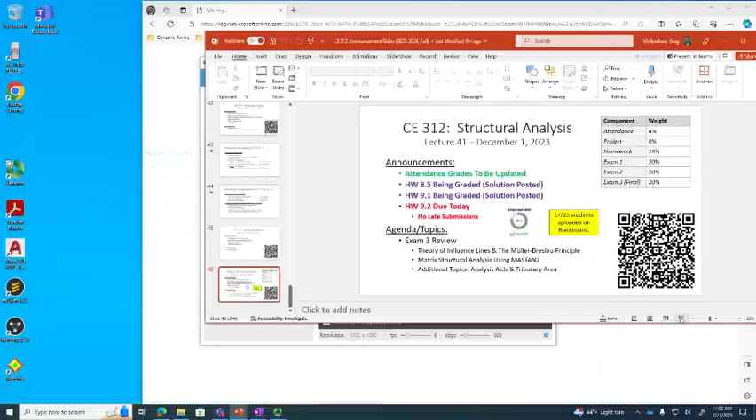Okay, so let's talk about the final. In terms of logistics, the first point I would make is that the final is no longer than any of the other exams. I don't create my final exam to be 2 hours long because I have a 2-hour long time slot. It's an exam like any others, okay? The only class where I probably have ever violated that rule is statics because the final's comprehensive. But in here, it's just another exam, okay?

It's closed book, closed notes. You can have a calculator and a formula sheet. Also, I think a straight edge will help with things like influence lines. So make sure to bring a straight edge. I do design the exam with my rule of 3. So if I can do it in 20 minutes, you can do it in 60 minutes. And I've given a final like this before, and the vast majority of students are walking out well before the time has expired. So I'll be here obviously the whole 2 hours, but it's not intended to be a time crunch.

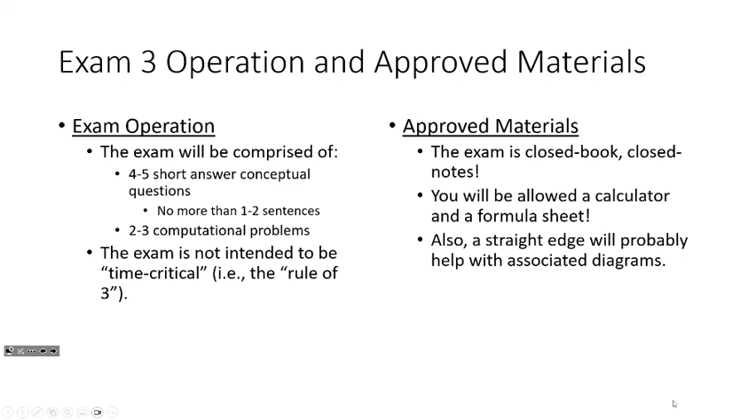As for the formula sheet, you can do whatever you want on the formula sheet, except I don't really want to see fully worked out problems. And again, that's more for your benefit than it is for mine. But I do want you to make it yourself. No just fully screenshotting the slides. I say that I'll collect them after the exam, but probably I'll just look at them because I know some students like to keep their formula sheets for reference for future classes. I keep the finals, but you can have the formula sheets when it's all said and done.

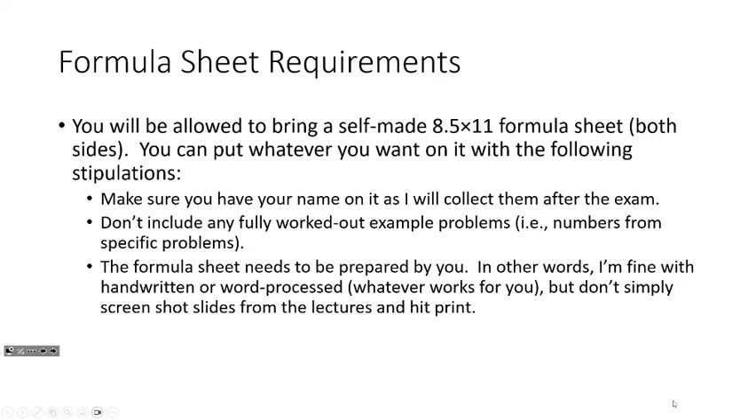Let's talk about the topics on the exam. So the 3 main topics on the exam are influence lines, MASTAN, and the stuff that we've done this week. For influence lines, make sure that you can construct an influence line for a response: vertical reactions, shears and moments at a given point, fixed support reactions, all that. Make sure that you can use an influence line to ascertain response due to either concentrated loads or distributed loads, and either loads that move or loads that don't. And then make sure that you can use those influence lines to develop maximum response. That's pretty much everything that we did with influence lines.

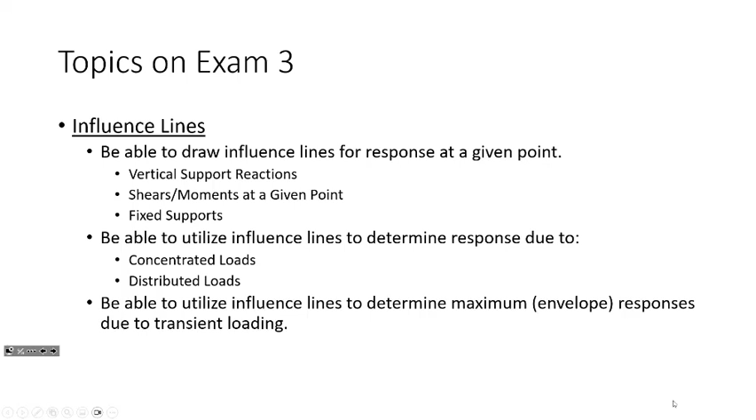For MASTAN, or the computer analysis of structures, I'm not going to make you break out the software. I want to make sure that you understand the software. So I want you to just generally understand what's going on with matrix analysis, but make sure that you understand the operation of how MASTAN works. So how to create the geometry, how to assign properties, how to define conditions, how to actually run the analysis and post-process the results. So that's really what I'm after, the conceptual side of things.

For the additional stuff, make sure that you can utilize and/or derive analysis aids for performing basic structural analysis, and then make sure you have an understanding of tributary area. That right there is the exam.

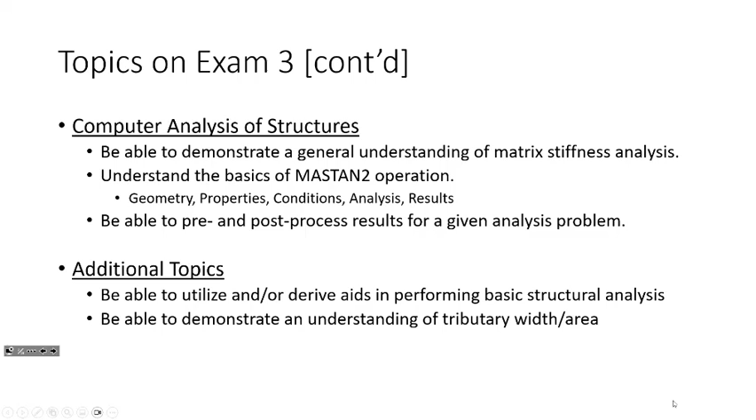What I have left in the slides are the greatest hits from the past few lectures. So things like, here are the rules for drawing influence line reactions. So for example, whenever you're drawing the influence lines for all the reactions, that's what I want to say. I have a beam here with 3 reactions. Here's all 3 influence lines.

You know that the influence lines equal 1 at the reaction of interest, and they equal 0 at all other reactions. They are always straight lines. The hinges serve to change the direction of the line. And whenever you sum up the quantities along a vertical column, they all sum up to equal 1 if you're looking at all the reaction influence lines.

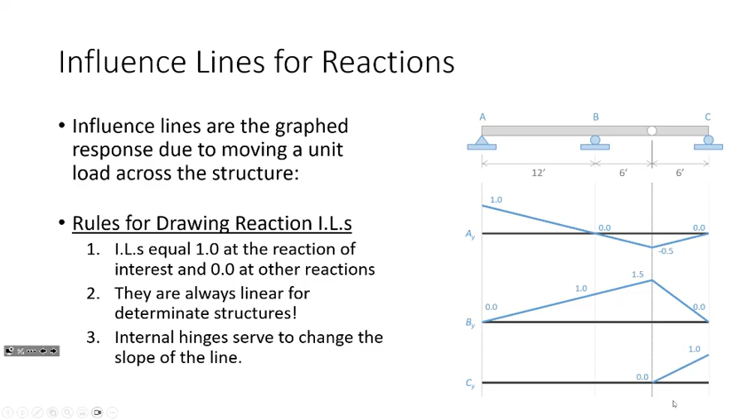For shears and moments, that's a different story. But if you have just all your reaction influence lines, that plus that equals 1 at every point along the influence line. For shears and moments, I've included the rule for determining the heights right here. Whenever you're drawing shear and moment influence lines, again, they're always linear. Again, the hinges serve to change the direction.

But the big thing for influence lines for shears and moments is that they always equal 0 at the supports. Okay? If you put a load at the support, the beam experiences no load. So at the support, the influence line for internal shears and moments is 0. Okay?

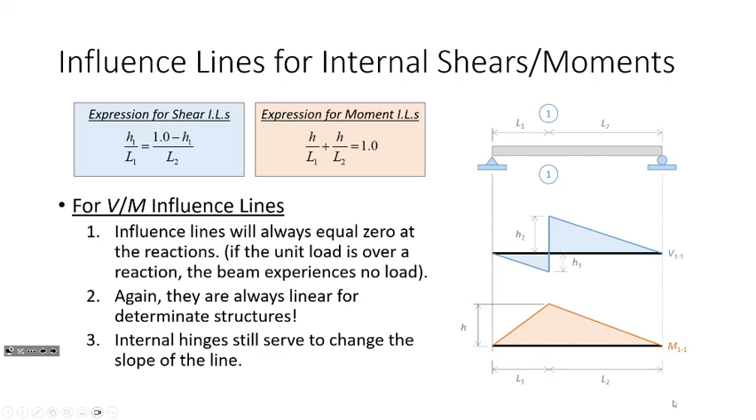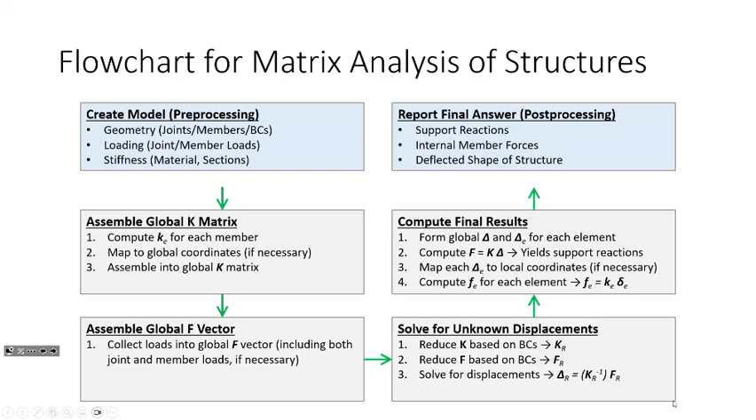We do the same thing with the forces, so we write a force vector for all the forces, and then we say, okay, let's knock out the rows and columns associated with the boundary conditions, and then we solve for the displacements. Take those displacements, back substitute them into each element, and boom, we have the whole structure solved. So it's a pretty systematic process for analyzing the entire structure.

Make sure you do understand some basics though. This is the sort of stuff with matrix analysis that I'm really focused on for the exam. The terms joint and node are used interchangeably. The terms member and element are used interchangeably. You need to adopt a consistent unit system, like kips and inches. This was something that tripped you up on some of the Mastan analyses on your project. A lot of you analyzed the truss in Mastan and didn't convert the joint coordinates to inches.

Things like our sign convention. Anything to the right is positive. Anything upward is positive. Anything counterclockwise is positive. Tensile forces are typically treated positive. The reason we do this is because really all matrix analysis is just writing equations of equilibrium over and over again. So when you write an equation of equilibrium, like sum of forces in the y direction, you've got to say everything up is positive from a numerical perspective. You've got to choose one of them to be positive.

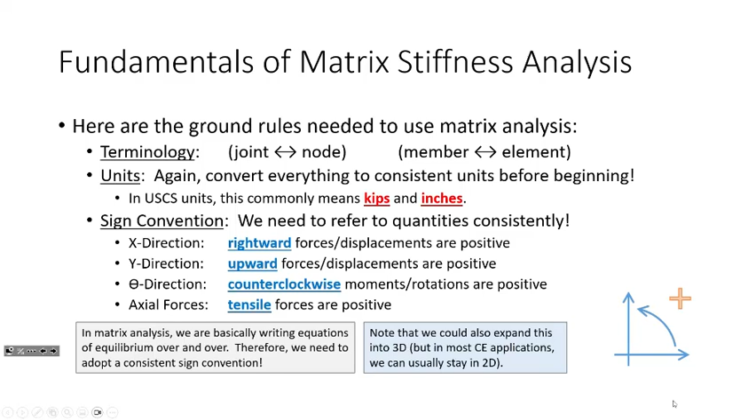Whoop, that slipped right out of my hand.

Whenever you are defining a Mastan model, you basically start at the left here and work your way to the right. So you need to define the geometry: defining the nodes, the elements that go between them, and the connections. Connections would be like hinges. Once we've done that, we have a model, but there's no properties attached to it. So we need to attach material properties and section properties. The process is that you create the components, and then you attach them to the structure.

You then define the conditions of the model. Mastan defines conditions as both the boundary conditions and the applied loads, and they use the term fixities for the support or boundary conditions. You then perform the analysis, and in just about all structural analysis programs, it's the most powerful step and the most anticlimactic step at the same time, because you hit this little button called analyze, and it gives you the answer for the entire structure. It seems kind of nuts.

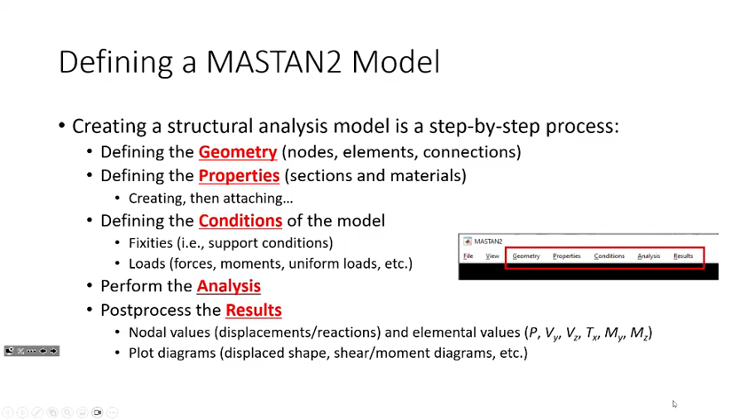Finally, you can post-process the results. Post-processing is just reviewing the results of the analysis: nodal values and elemental values. Nodal values would be like displacements or reactions at the joints. Elemental values would be things like the axial force, the torsion, the shears, the moments inside each member. We can also usually plot those as well.

I've defined here what nodes and elements are to be more specific. So nodes are where the software is directly going to compute deformation.

So the way that matrix analysis works is whenever you're doing a finite element analysis or a matrix analysis, you're directly computing the deformations at the joints, and then you're interpolating everywhere else. And so you generally want to place joints at the support locations, at any internal hinge, at any truss joint, at any point load locations, and what I'll say, all other points of interest.

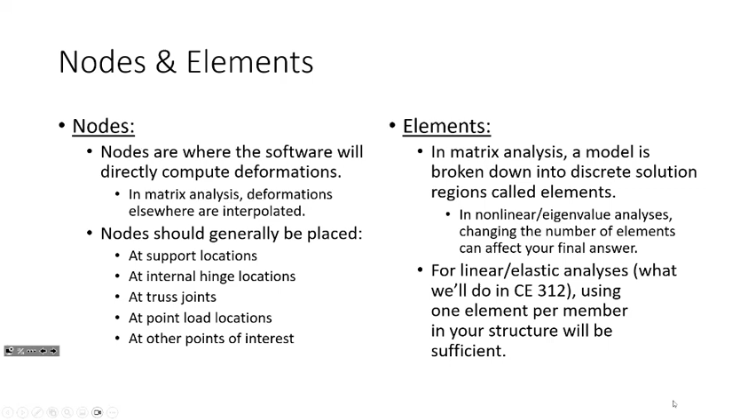In a linear elastic analysis, that's really just if you're genuinely interested in a shear, moment, or a response at a given point. But if you're ever doing a nonlinear analysis or an eigenvalue analysis, the more elements you have, maybe the more accurate your answer will be. So there's actually a science behind that, like how many elements do you need to use to get a given answer. But the way elements work is that whenever you're doing matrix analysis, you break the model down into these discrete regions, and then for each of those regions, you write one of those stiffness matrices I was talking about. And for us, we just have one element per member.

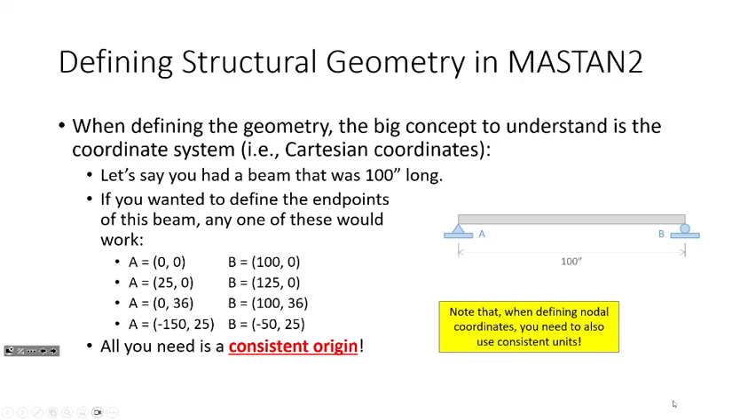So whenever you're defining geometry in MASTAN, you just need to adopt a consistent coordinate system or a consistent origin. So if you had a beam that was 100 inches long, it really wouldn't matter. I've got 4 different options for the X and Y coordinates for joints A and B, and it doesn't really matter which one you use. Any one of them will work because you'll still end up creating 2 joints that are 100 units apart in the X direction. So as long as you have a consistent origin, you can do whatever you want.

And then the last thing, I don't really have anything on structural analysis aids because all that's just sort of derived. But for tributary area, make sure that you understand the tributary area. We're defining that as halfway between adjacent elements. That's what I have for what's on the exam. I'm going to stop talking and start answering. The floor is yours. Yes?

Okay, so you say you didn't have anything on aids. Are we going to have to make up an equation or anything? That's a good question. So what I'll say is if I require you to use an analysis aid that's really out there, like some analysis aid of a triangular load or something weird like that, I'll give you the analysis aid. Now that being said, something basic like a simply supported beam with uniformly distributed load, you might want to put that on your formula sheet, because the homework that you all just did, you used those formulas like WL squared over 8 for the tributary area homework. So that is an aid that I could see you using, okay?

Now the other thing I'll mention about analysis aids is if I give you a problem where you need to derive one, well, that's the problem, right? But let's say I give you a structure and I say, use tributary area to find shears and moments, etc. You could just not use them and analyze the structure directly, and that would be fine too. Again, you've got plenty of time, so time's not really an issue. Does that make sense?